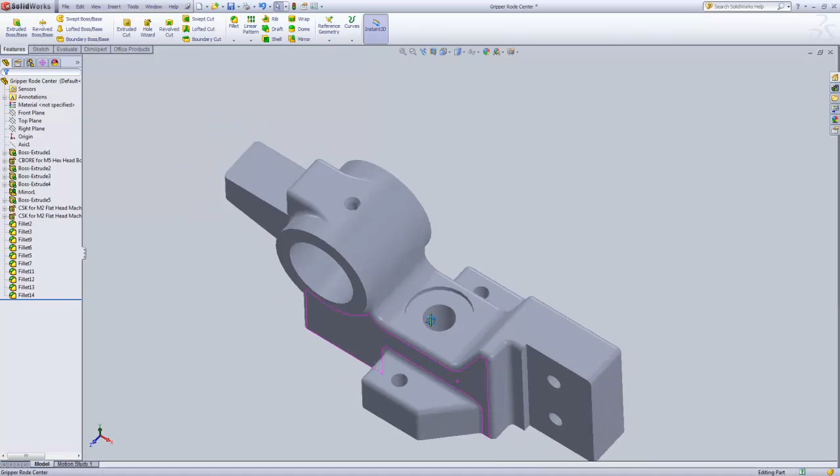Biggest question with this is where to start. For many of these features, there are some reference points in the drawing. The two biggest reference points are this circle here and the center here. There are many dimensions that refer to the centers of these two circles.

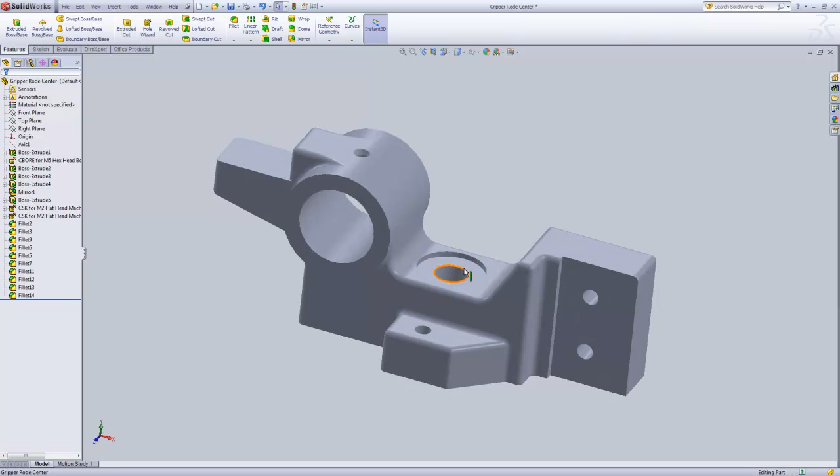Now, obviously, this lies flat on some plane, and so that's where it's going to be centered. So I believe that this hole and counterbore are the most crucial locations for this part. So I'm going to base my model off of that assumption that this center is the most important aspect of this part. Planning this out is a very important part of solid modeling.

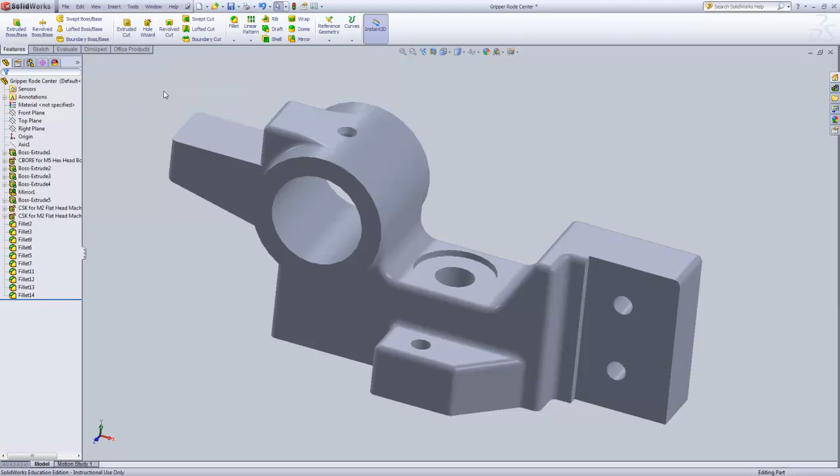You want to think about your parts ahead of time so that you know where you're going to start, you know where you're going to end up, you know how you're going to get there, and it's all going to make sense to the next person who sees your model. If it doesn't make sense, you're missing half the point.

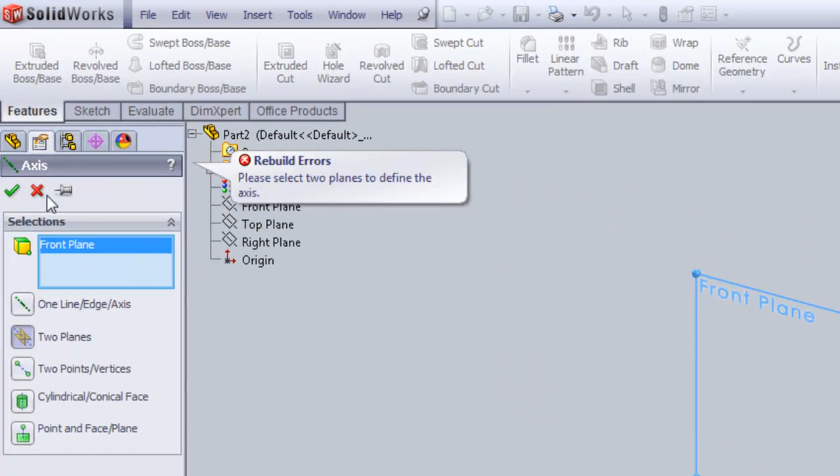Okay, so what we're going to do is start not even with anything physical. I've decided that that axis is the most important thing, so I'm going to actually create a reference axis. And it was two planes, the front plane and the right plane, that determined that axis. Never caught my right plane there. There it is. And there's my axis.

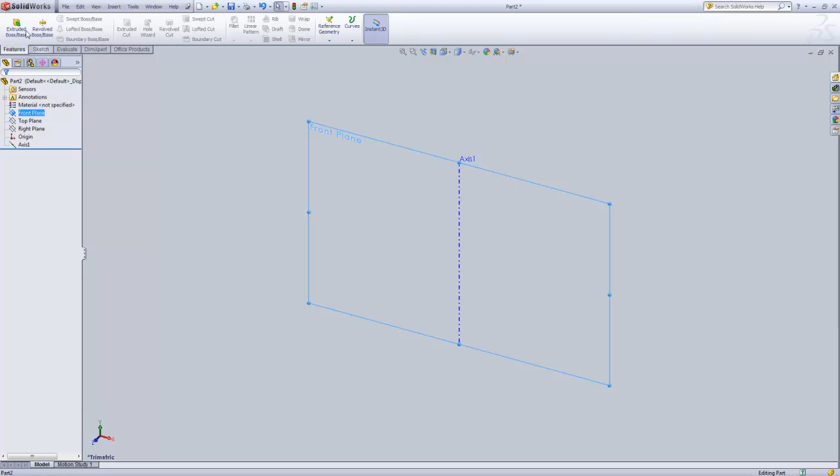Now I'm going to create the lower part, and this looks like it was designed to be machined out of one large section and then cut down. So I'm going to start on the front plane and make an extruded boss and place my origin on the bottom plane of the part, at the center of that hole where I put my axis.

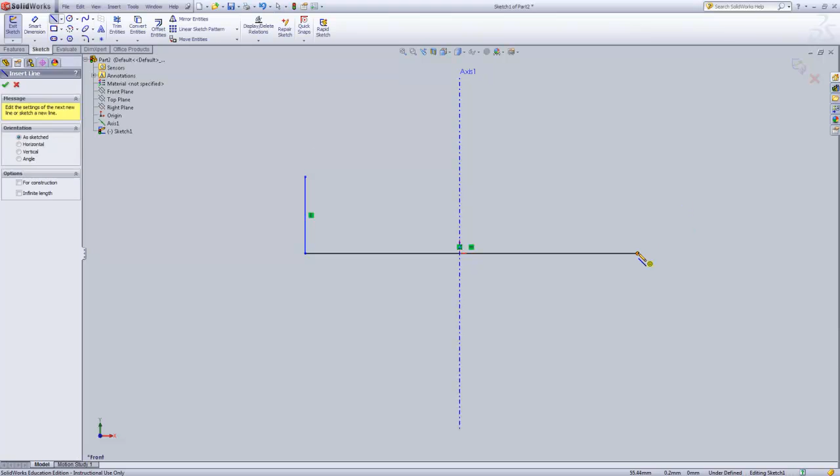So go from here, far right to far left, then up. Now I can capture this circle. I'm going to do the right hand side first. But I can capture that circle, at least its outline, fairly easily.

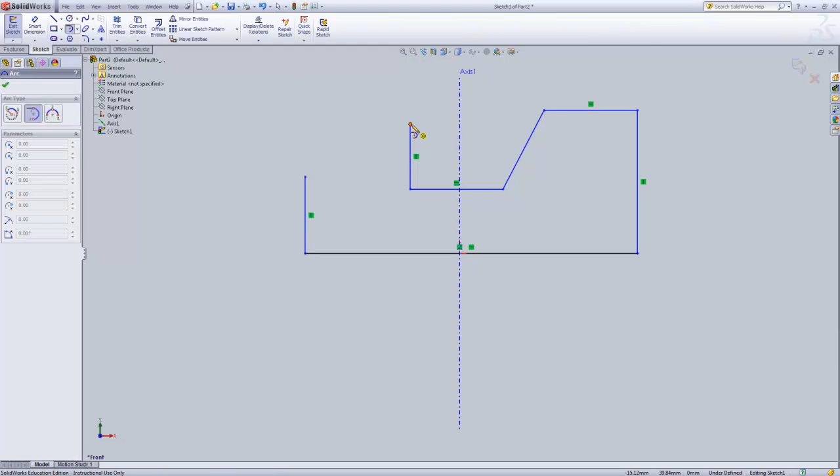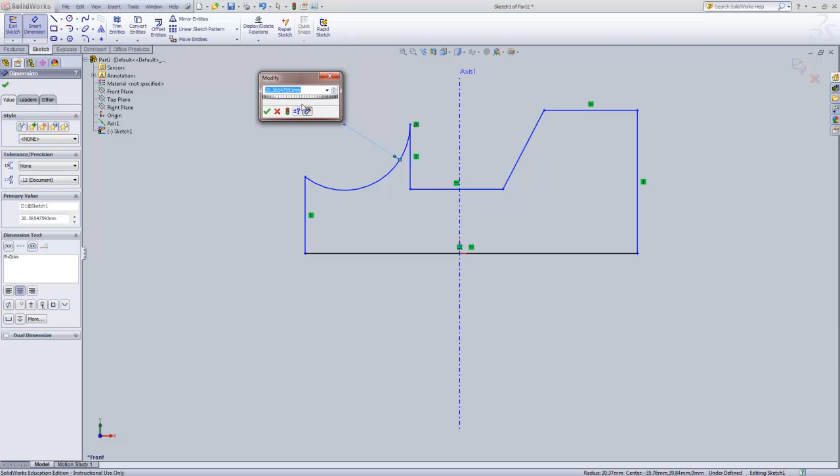I'm going to make a tangent arc from this point, and I'm going to end right there. Now all I have to do is dimension everything. I'm going to start with this arc, and I could just let it be a radius and take it and divide it by 2. But instead, I'm going to right click on it, go to display as diameter, and then I can enter in the diameter just like I wanted.

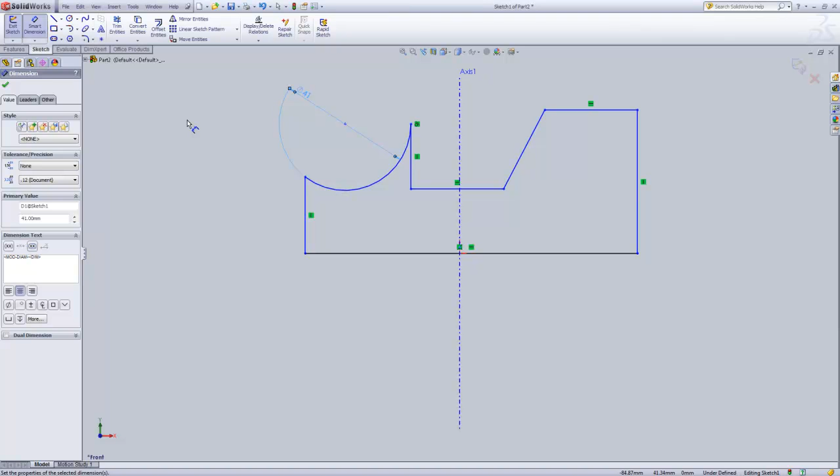So it's a 41 millimeter diameter. And I'm going to put in a center line here. Make sure that it's vertical so that I can create a nice easy 30-degree dimension there, specifically with respect to vertical.

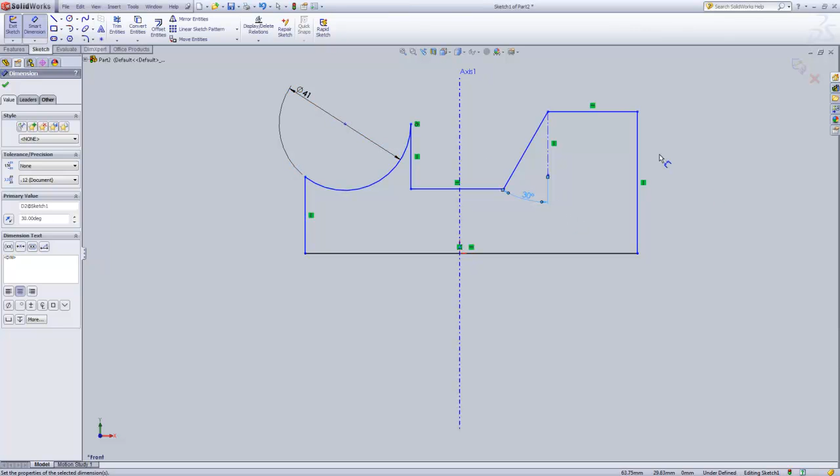And let's hit the big one. So you got 48 here and 121 across there. 41 here. And the center from here to here is 38.

And the height here is 44. Make sure that that's tangent. Yeah, that's tangent right there. The height here is 29.

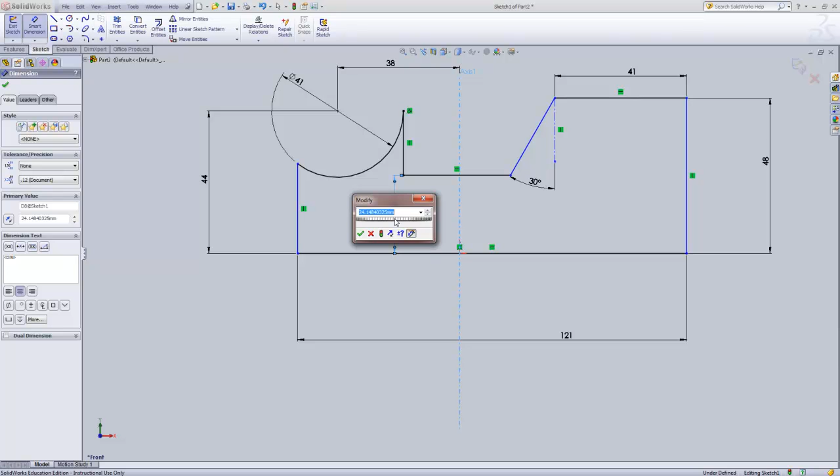And the distance from the center of this circle to the outside is 12. That makes everything turn black.

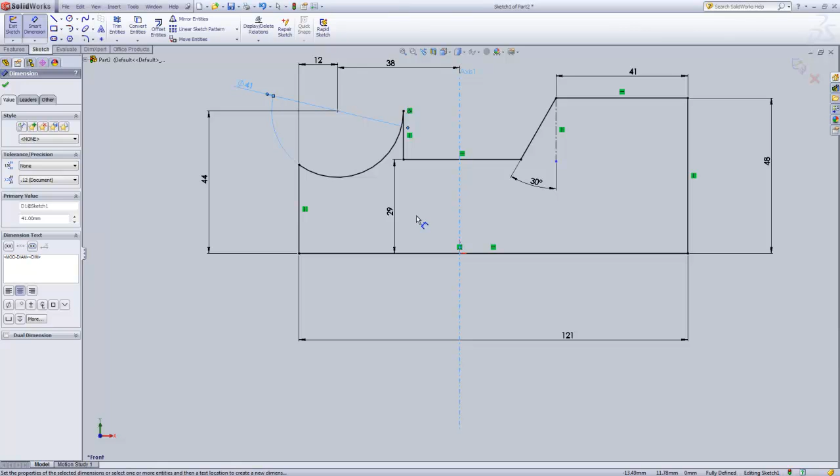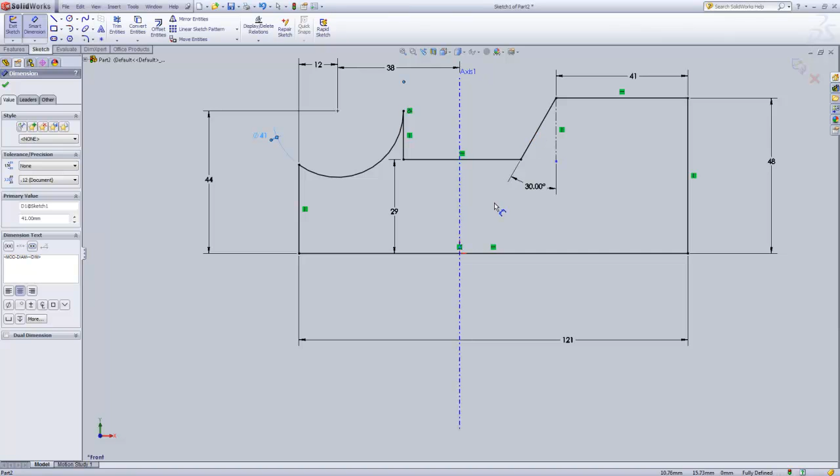I did notice that my drafting standard is in ISO. So I'm going to go up here, go to Document Properties, so ISO, go to ANSI, hit OK, and it looks a little better to me. Okay, everything's turned black, and we are good to go.

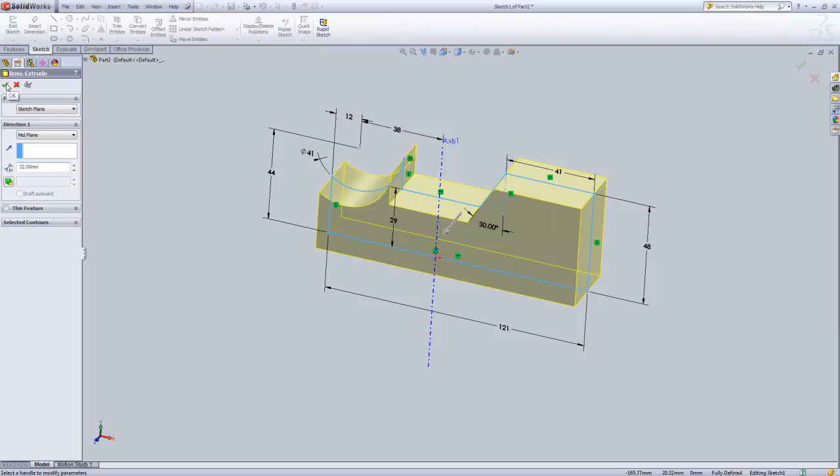Now this is showing a blind protrusion. We want a mid-plane, and diagram says that it's 32 millimeters wide, and looks good to me.

Now, because I have chosen that this axis is the most important thing, I think we should probably put in the hole. So we're going to put a hole wizard in here. And note that I have this set to ANSI metric. If you don't do that and you just type in specific numbers here, things might get a little large because you'll be typing in 2 inches rather than 2 millimeters.

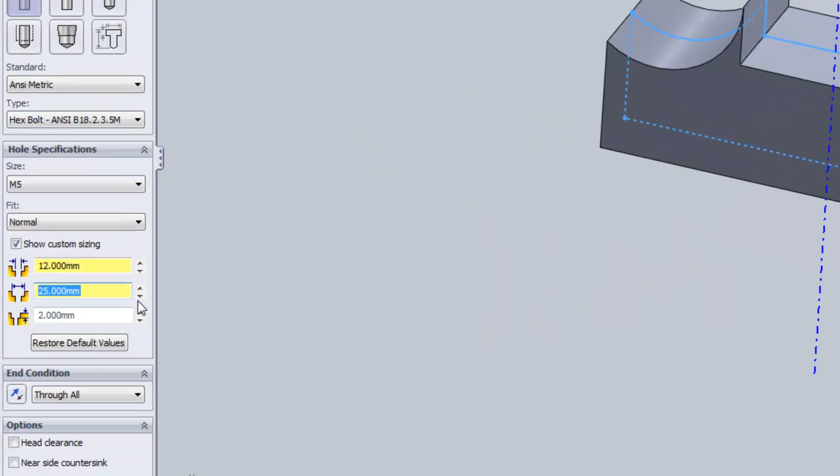So our central hole shows a bore diameter of 12. And we need to use the correct hole type here. So here's our counterbore of 25 and a depth of that counterbore of 2. We need to make a position for that.

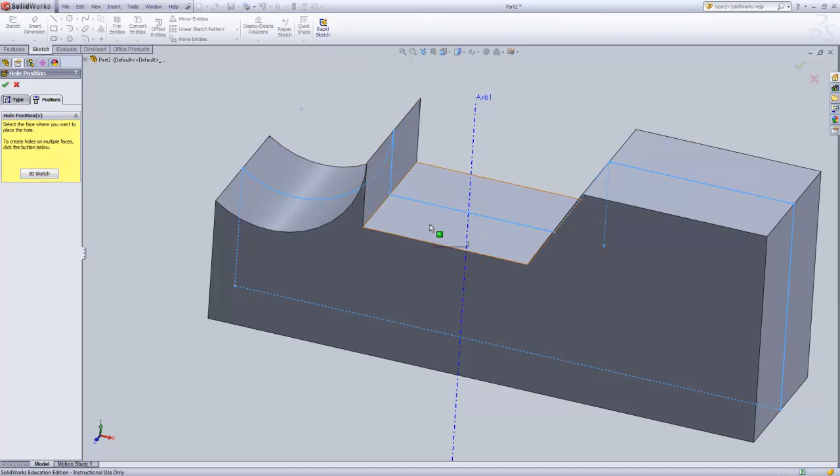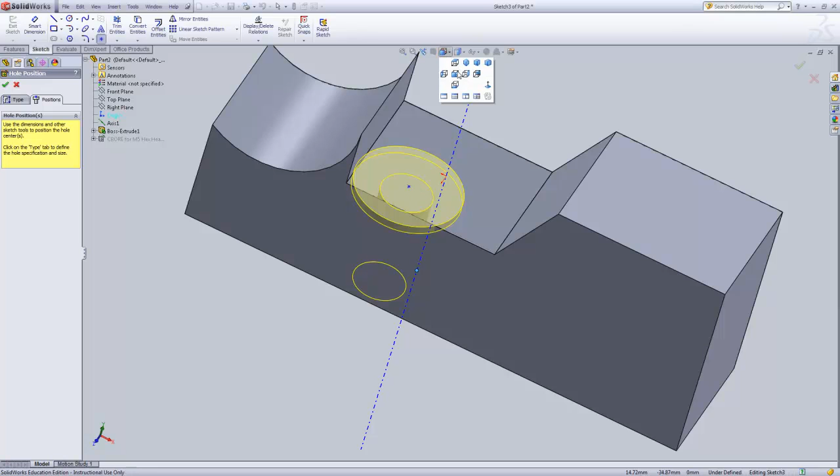And note how I'm going to put a point. Note how I did not put the point right over here, because Hole Wizard is a little difficult in that manner. It's best to put the point offset from where you actually want it, then go back in, stop putting points in, and align it exactly where you want it to go. In this case, I want it to be right on top of that axis, coincident, and here it is.

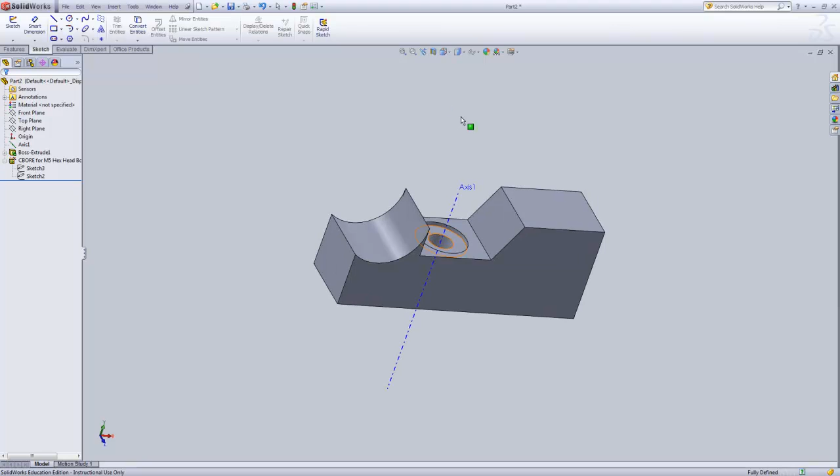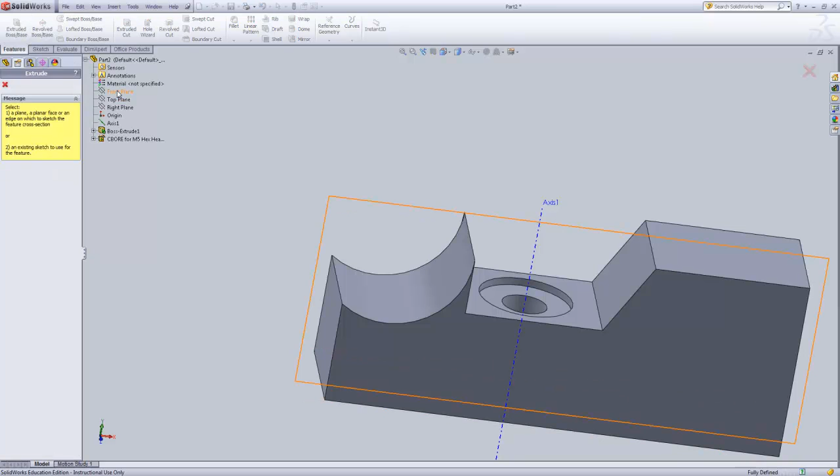Okay, now to make the ears and forehead and nose of what looks like a dog, I will go to Features, Extruded Boss Base, and we'll be making this off the front plane. Change my view to front, and I'll make a circle.

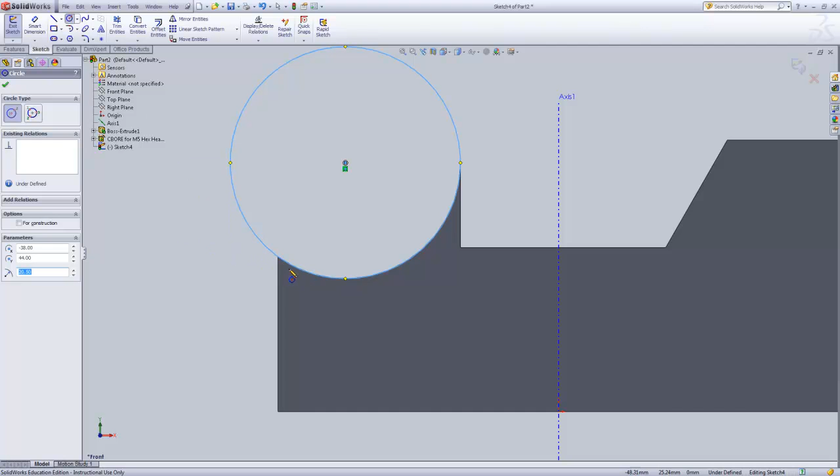Now I can simply hover over this arc. The center of the arc will appear. I can click there, come out here. Unfortunately, it won't specifically associate with that, so I will need to make it happen.

If I click there, hold my mouse key down, hold my control key down, click on that. If I click here and hold my control key down, click on that edge, I can make them co-radial, which means they share the same center and the same radius. Good with that. Now I just need to make the inside part.

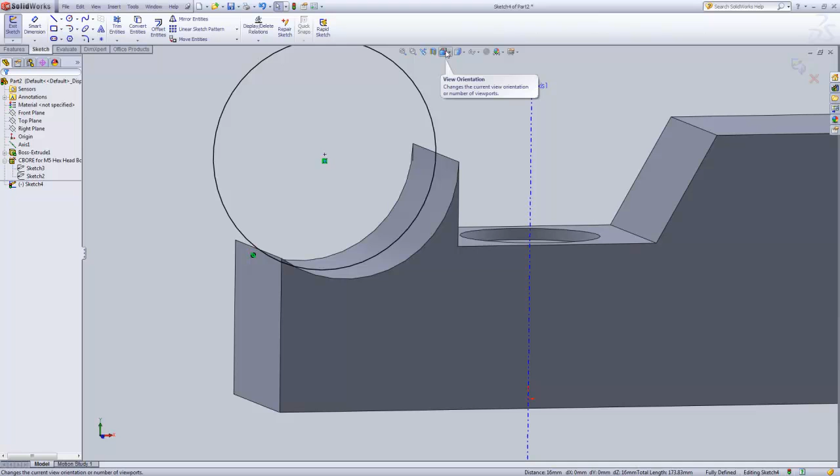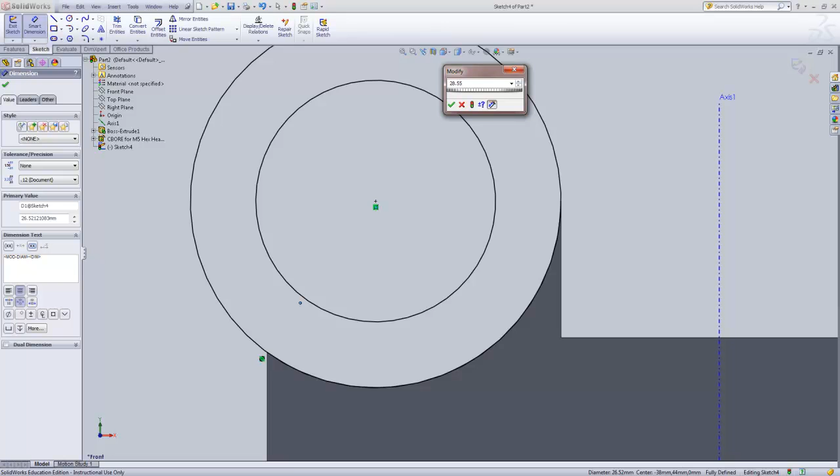There we go, and it is to be 26.55 - well, 26.57 high, 26.52 low, reamed. Some other part is going to be inserted here, and these are very tight tolerances, so it's got to fit right. Since this is a mating part, this is a very important detail of the entire model.

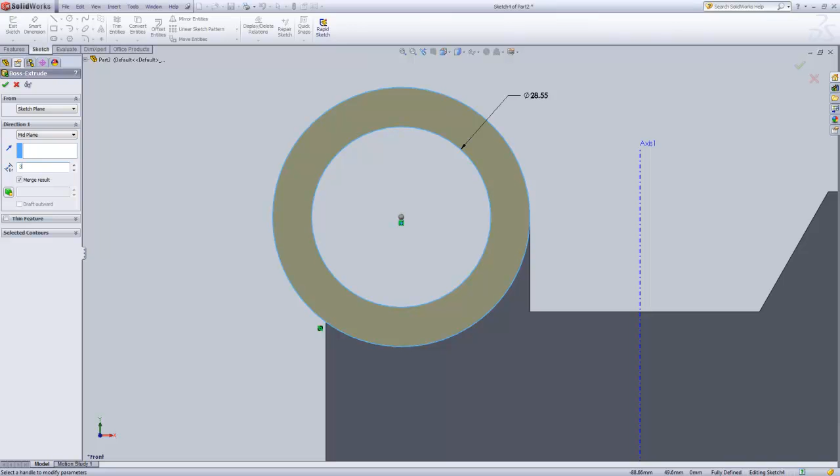And we want to do another mid-plane extrusion, and it indicates it is 38 millimeters wide. There it is.

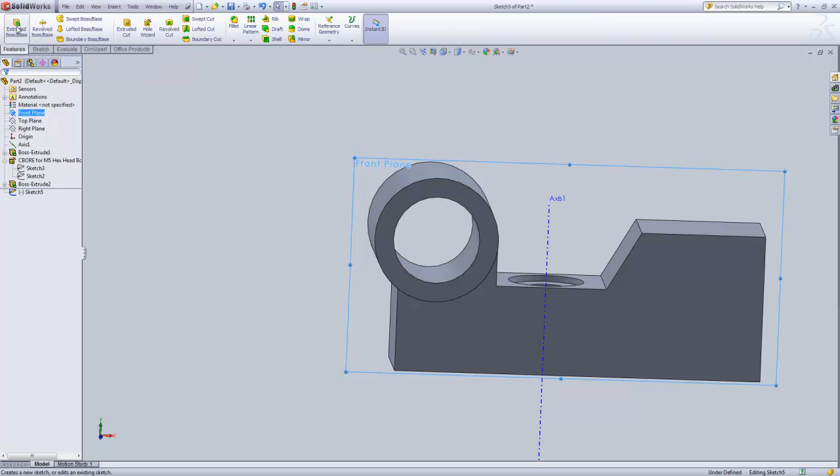Next step, I'm going to go back to that front plane again, make another extrusion, and now the top of the forehead of the dog comes right off of the top of the circle. So it comes down over, down like this, and then this should go right on that circle.

Now to finish it off, we don't want to leave this hanging, although sometimes it can be helpful or easy to do. We should always try to close the loop. Don't want to get these computers confused.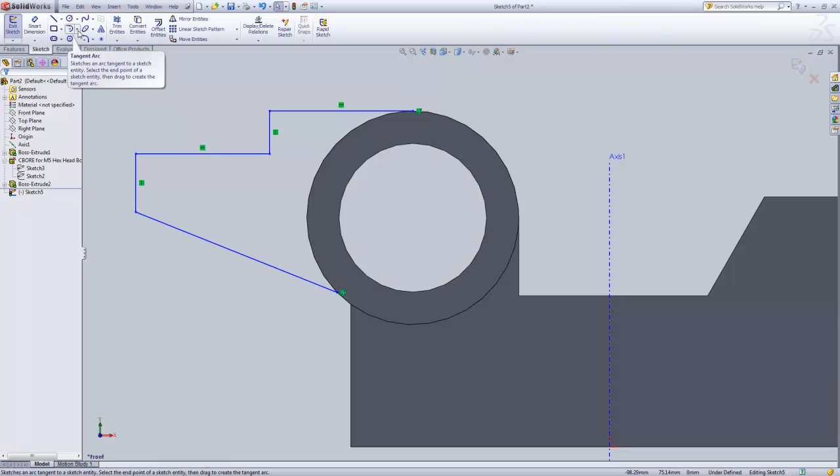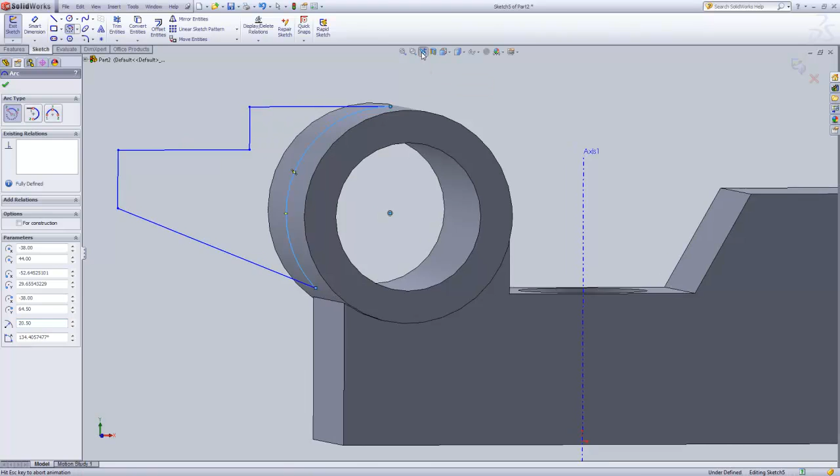So I can make a center point arc. I just hover over this circle and the center comes out - there it is. Now I'm trying to go around, but notice how it's not doing it the way I wanted it to go. Here it is. Now if you're having trouble seeing it, all you got to do is move this around. Ah, there's the edge. And we can come right up here. And I can just click this button to go back to the view we just had.

And it's time to dimension. So from here up to here, overall dimension of 51 millimeters.

I think I'll make another center line from here out. Make sure it's horizontal. Dimension this to be 14 degrees. This is 13. 28. And this is 14 here.

One thing that may not be very obvious is that this needs to be not just on the circle, but tangent to the circle at this point. So I'm going to make sure that this line here - hold the control key down - and this arc here are indeed tangent. And everything turns black.

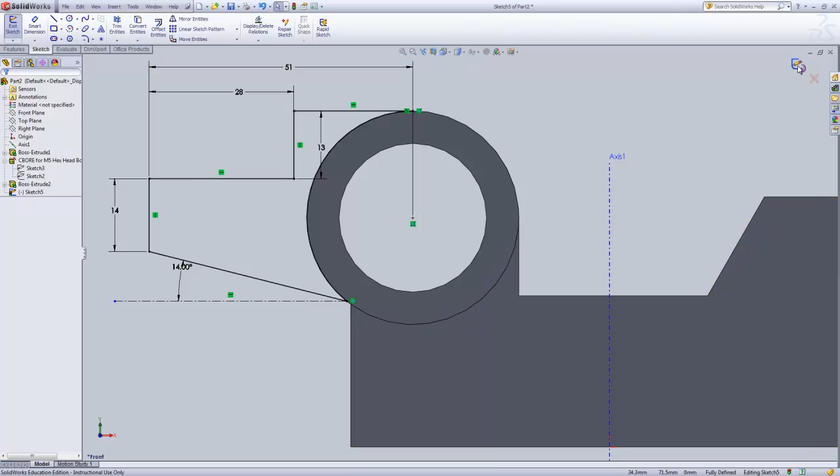I'm done with my sketch, looking it over. And again, we need to choose a mid-plane extrusion that is only 20 millimeters wide. And there is the snout of the dog.

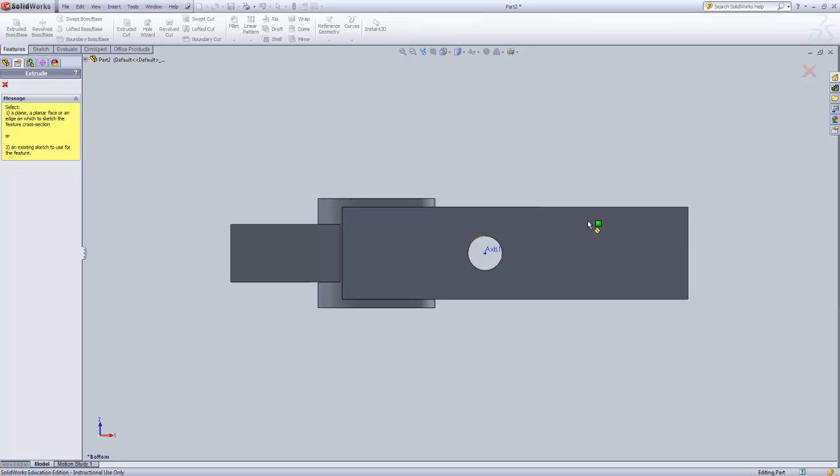Moving over to the haunches of the dog, going to turn it upside down. Make a boss base from this plane here. And just need to make a few quick lines - note how I'm still going to close the loop.

Make that circle. And then, whoops, made a mistake. Okay, just hit escape.

Dimension this as 6 millimeters. This depth as 16. From this line to this line, 26. And from here to here is a horizontal - again, we can go at a slant or we can go vertical, but horizontally it's 16.

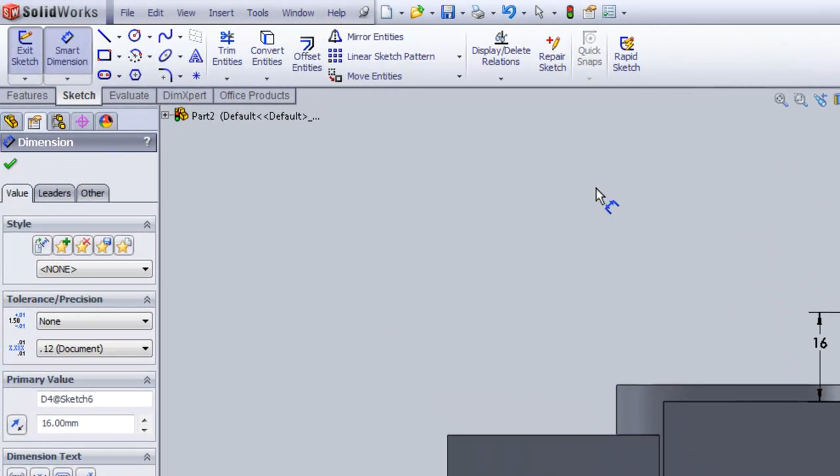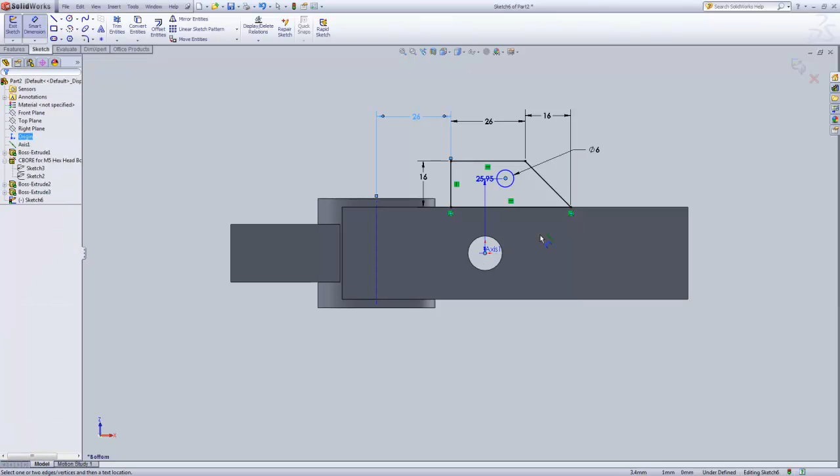We just don't know where it is. We're going to have a hard time dimensioning this to the center of the dog ears, but we can go to View, Temporary Axes, and here's the axis. The axis comes up from here to here - it's supposed to be 26 millimeters. And this center here is supposed to be 24 off of that center.

Finally, this center and this center must be vertically aligned - just line them up top to bottom. We don't need to make any other dimensions than that.

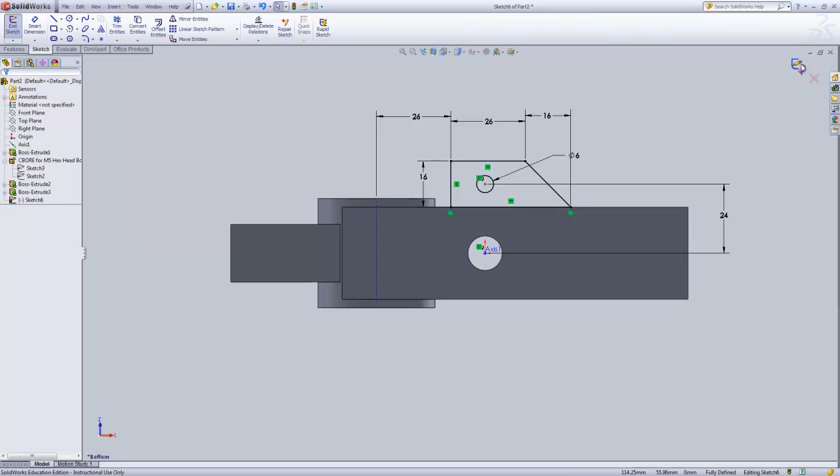Now, oh dear, it's going the wrong direction. All we have to do is click this button and it's going the correct direction, and its height is to be 16 millimeters. That's about right.

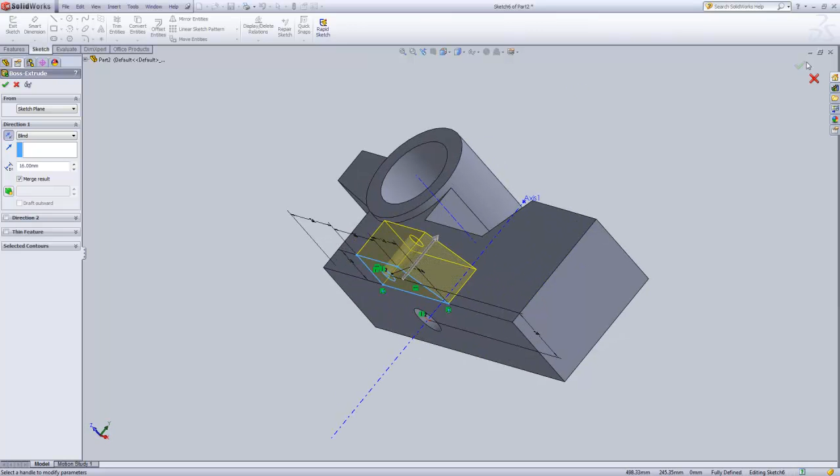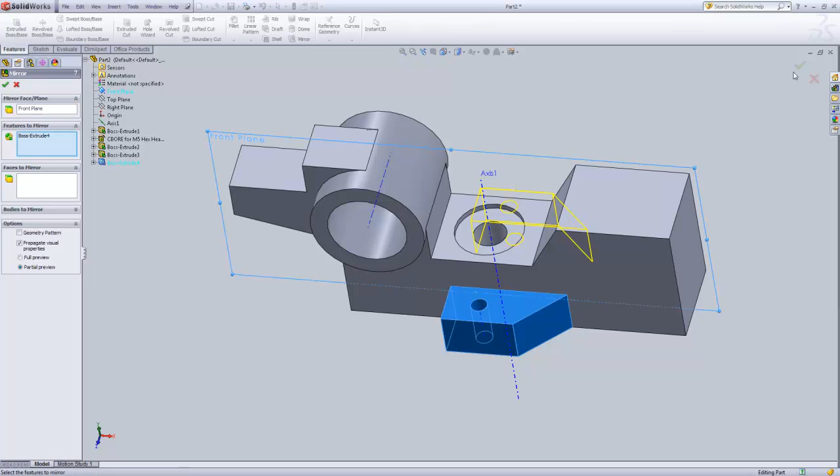Now we can simply take that, go to Features, Mirror, and we're going to mirror about the front plane. There it is.

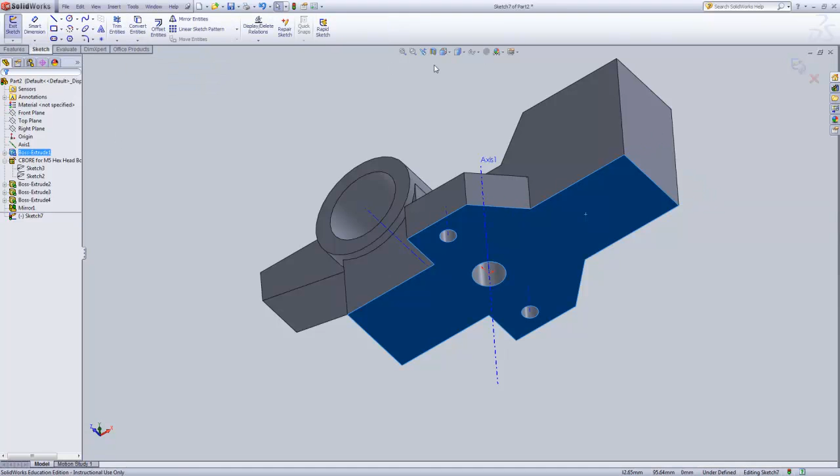Next, we're going to work on cutting out the section here. I'm going to go back to the bottom, click on that plane, go to an extruded cut, view from the bottom, go here, down, over, down, out to here, up to the corner, and then back here to close the loop.

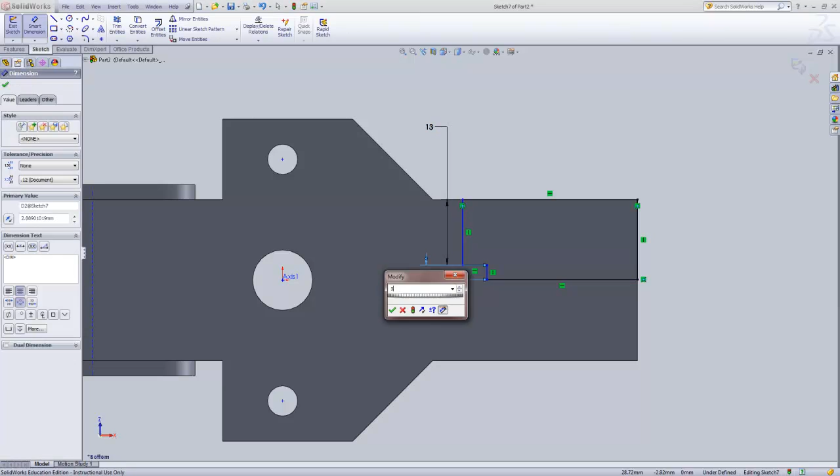The dimensions are fairly straightforward - that's why I use it as a cut rather than extruding it. This shows 13. This is 3. Okay, from here to here is 6. And from here to here is 29. Everything's turned black and looks good.

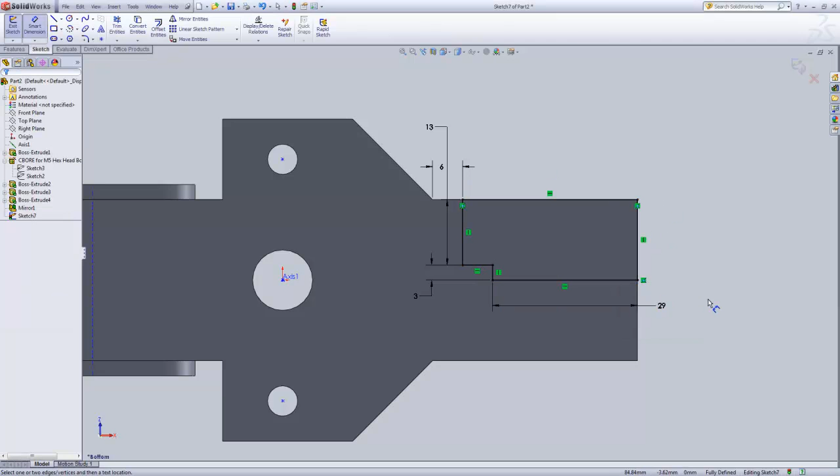Now it's not going to be blind, it's going to be through all. We've got going the right way - there it is. So this is our base shape.

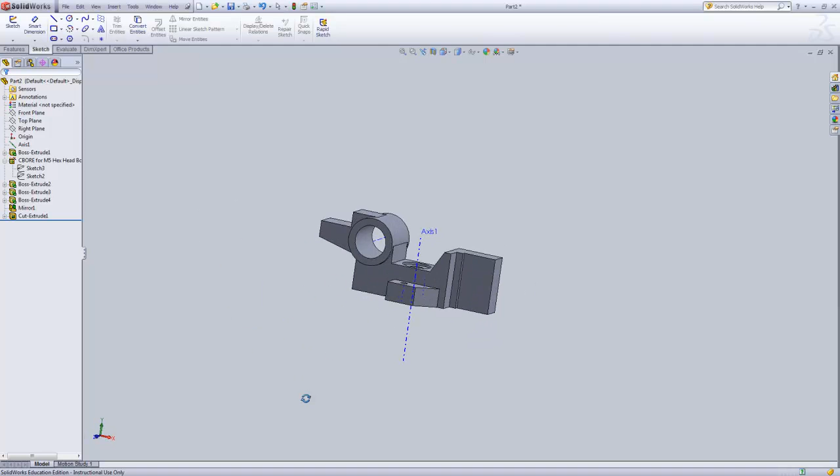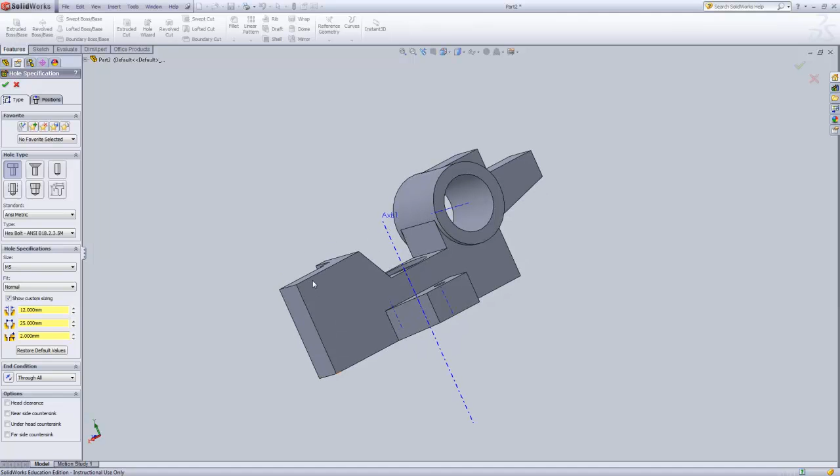Now all that we need to do are put in a couple of holes. So our first set of holes, we'll deal with Hole Wizard again. I'm going to put them in on this side - they are angled countersink. So the through hole for each of these is 6 millimeters, and it widens out to 9 millimeters using an angle of 82 degrees.

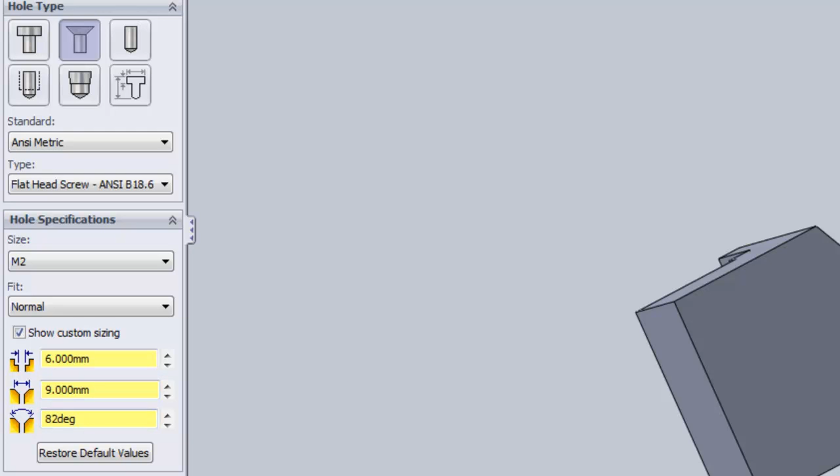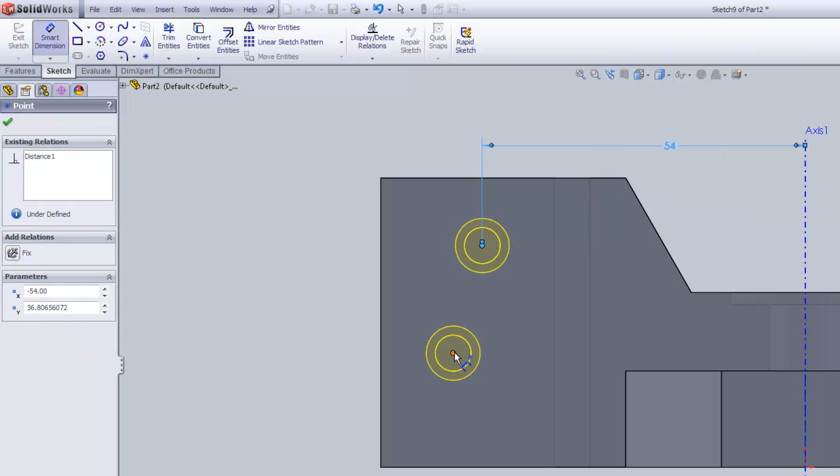Our positions are approximately here and there, and we'll get a closer look at how to dimension them. So this shows 54 millimeters to this main axis and a height between the two of 22 millimeters. And the first one is 13 millimeters from the base.

And then all we have to do is put in a relation between this and this, and we want them vertically aligned. And that's what we got.

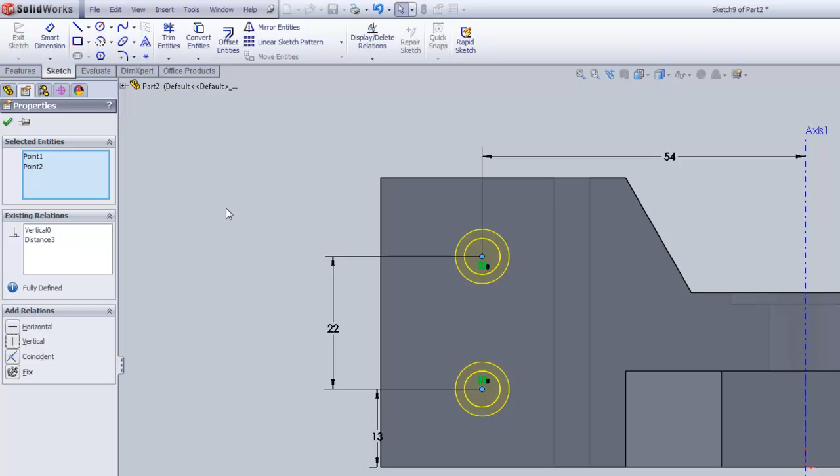And they go all the way through. Okay, one more hole. This really shows you the benefit of making sure your Hole Wizard hole is not located exactly where you click. In this case, it can cause some troubles, and you want to make sure that it's right where you want it anyway.

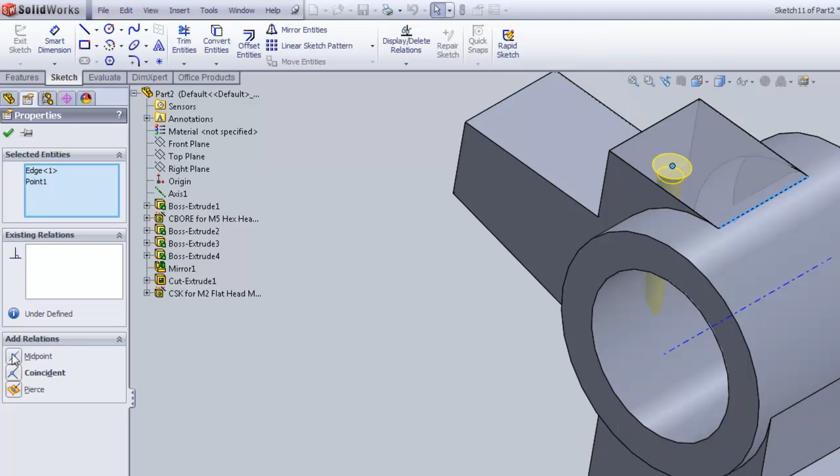So in this case, we have a 4 millimeter through hole, and it expands out to 6 with an angle of 60 for countersink, and we want it right there. Not really—we want to make sure that we click off of selecting points and select that point, hold down the control key, and be right on top of the circle, right where this edge is. We could put it coincident and then make it go onto one of these planes, I believe the front plane, but we can also just choose midpoint, which will do both in one click.

Now here's our trouble. This is going all the way through the bottom. We don't want that—we just want it to go through next. So let's go back over to type. Look down here, end condition: through all. Let's just go up to next. That'll do just fine.

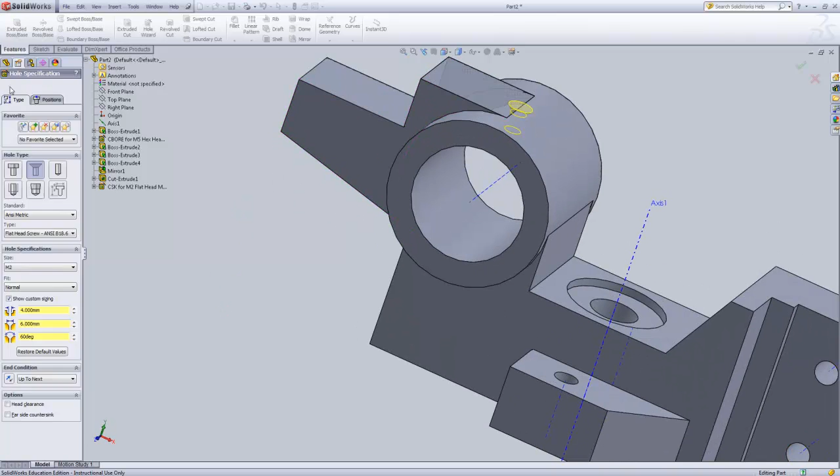There we are. All of the major features.

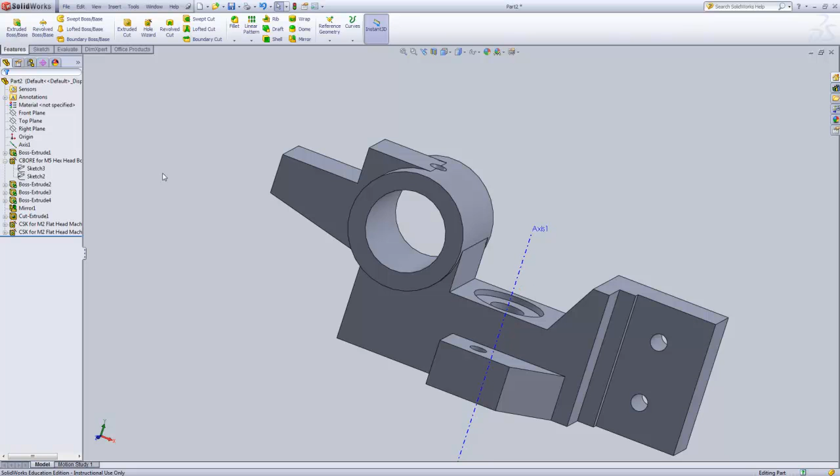Now I'm going to take that view temporary axes out, and I'm not going to be using this axis at this point, so I'm going to right click on it. If I suppress it, everything else gets suppressed—that's not good, that's not what I wanted. I'm going to bring it back up, unsuppress it, and maybe the easiest thing to do is undo the suppression. I just want to hide it, so I'll right click and hide it, and there it is—it's gone.

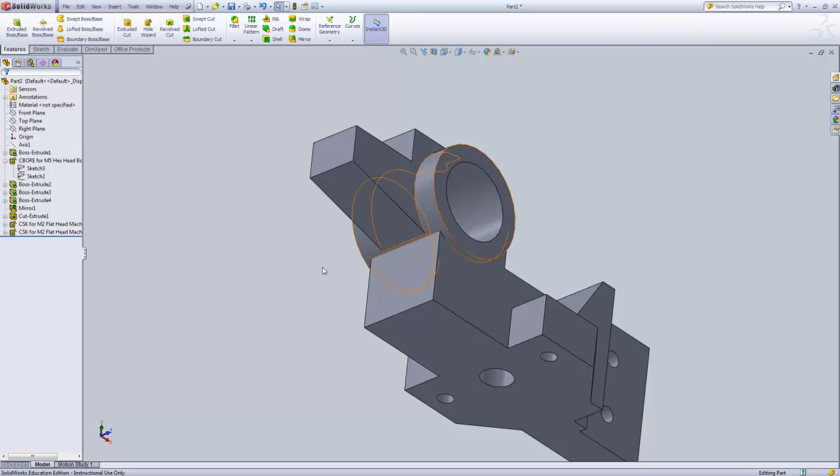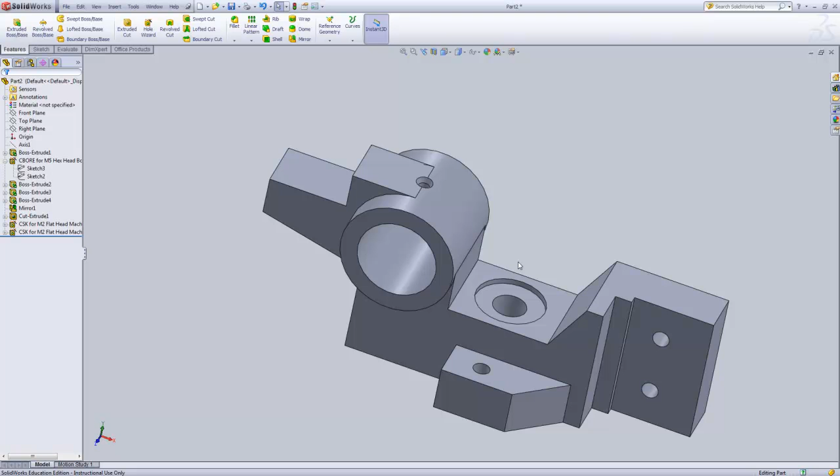Last but not least, we have all of those rounds and fillets, and they may seem simple, but they are actually quite difficult to accomplish. This is one of those cases where it's easier to draw them in on a sheet of paper and just say do a 2mm round, than it is to actually achieve in solid modeling, because the computer will say this is running into that, and it's only a round—not that big of a deal—but it is to the computer when the geometry doesn't add up. First things first, these two edges actually are indicated, kind of hard to see, as 6mm radii.

So we're going to go to fillet and click on these two edges here, and make them 6mm. Notice how this runs into the other circle, creating some funky geometry. That's a little bit weird, but like I said, the computer will take you literally.

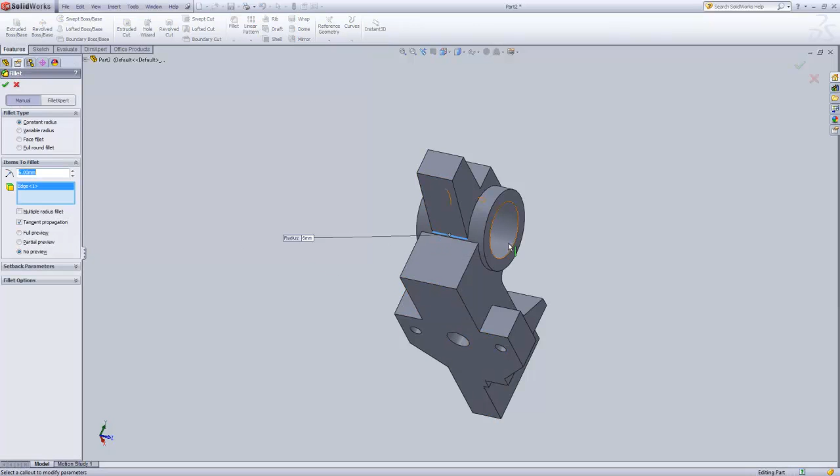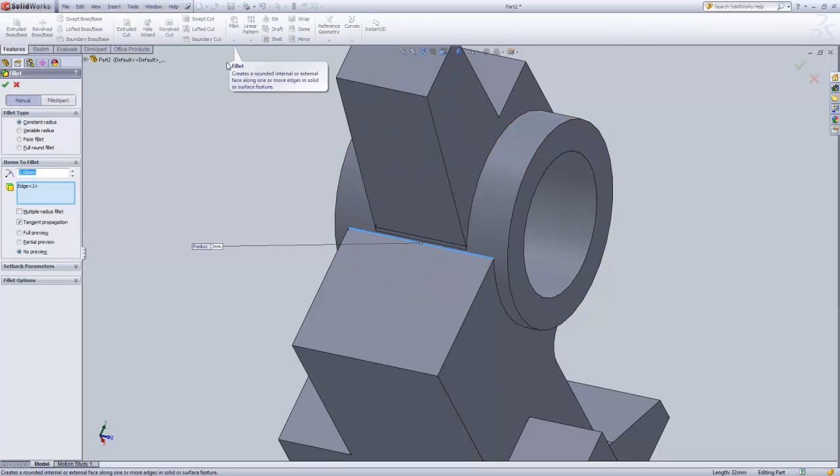Next thing to do is make the rounds down here. Now notice that filleting that edge and that edge, I'm going to make sure it's 2mm. Even so, this can cause a problem—they run into each other, so we'll have to delete one of them and see what happens. Okay, this works. Now we go in and make a different fillet for that edge, and it goes over the other one instead of trying to be made at the same time.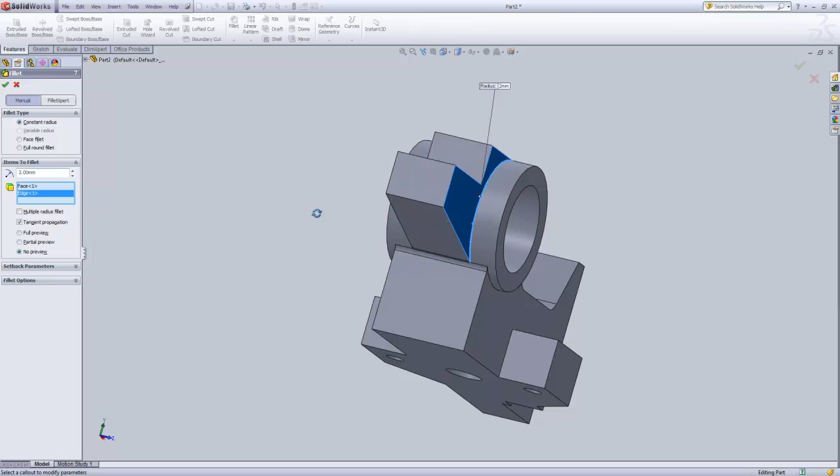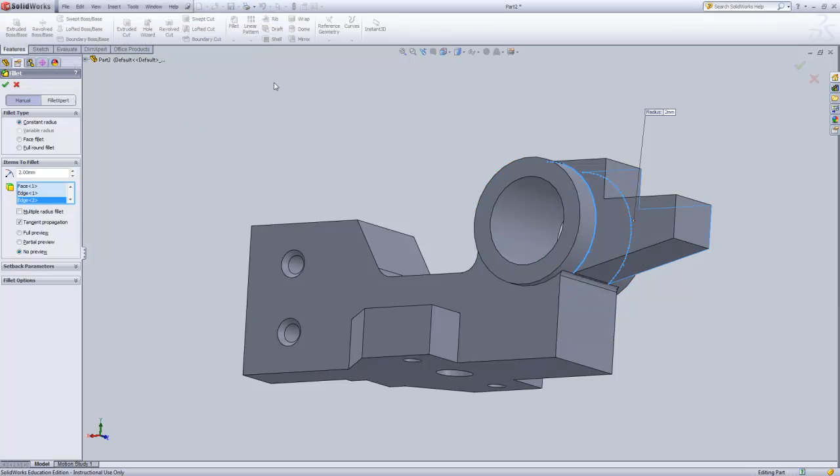Now notice we also have problems right here with this edge running into this funny geometry. So let's see if we can do that: fillet, that edge, and this edge, 2mm. And it's having a hard time calculating it all and does not like it.

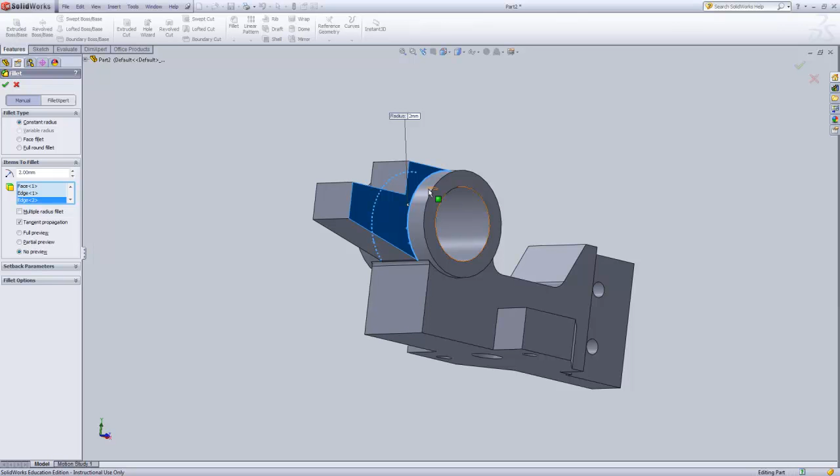I'm not going to waste any more of your time showing you things that won't work. I will let you waste your own time trying to figure out how to make all of these fillets. Some of them are fairly easy and straightforward; some, especially in this area, are not.

To recap, I started out not even making an extrusion. I started out with an axis because this seems to be the most important aspect of the entire part because of the dimensioning that goes along with it. It must be used to assemble to other parts of the assembly, so I made that first.

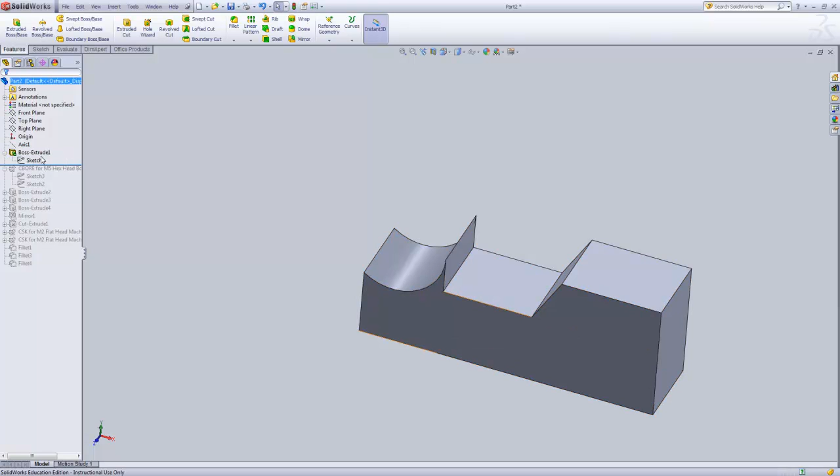Next, I extruded this boss in a fairly complex shape so that I could make use of its overall dimensions and easily create some of the next features afterwards. I used that axis to make this hole that's so important.

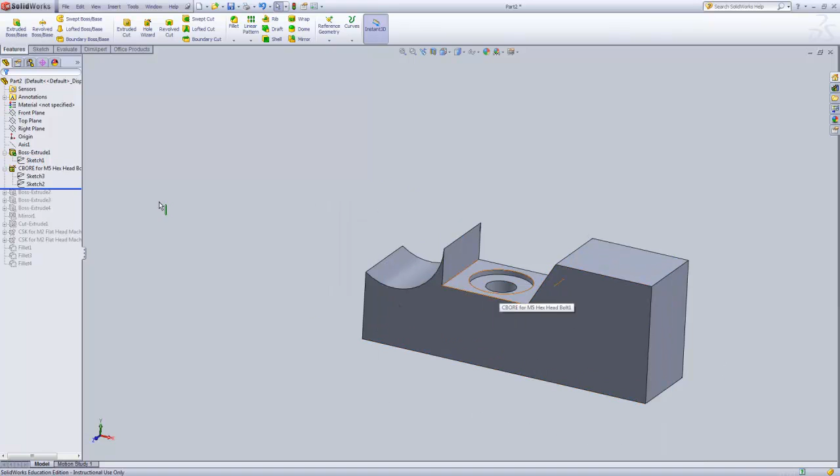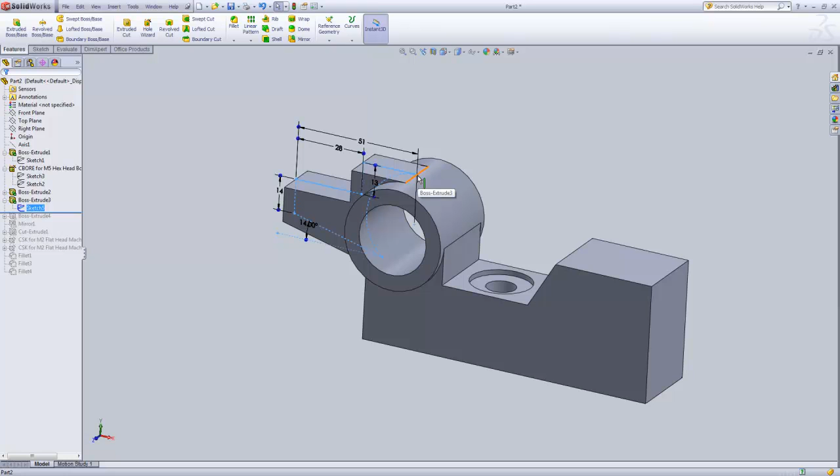And it was pretty simple to make the ears of the dog, and then the snout of the dog had a couple tricks in it, especially up here where I had to make it tangent and coincident on that circle. Then I made this simple protrusion and mirrored it on the other side. Then cut this shape out, and the base parts were done.

Made the holes using Hole Wizard, made this hole using Hole Wizard, again creating the points off of where you actually want them so that you can place them exactly where you want them and not have any troubles.